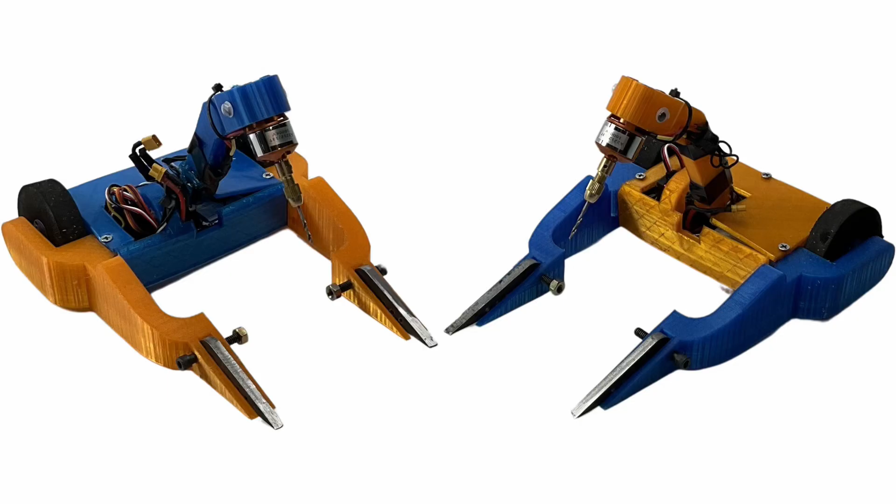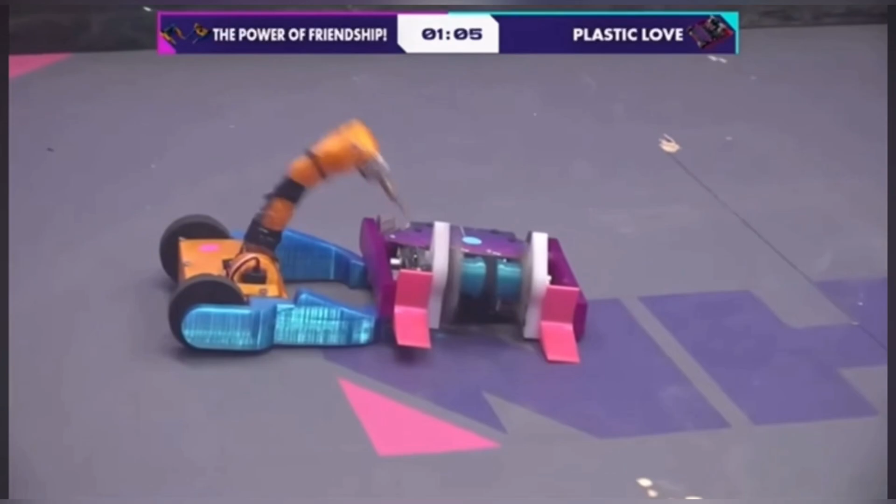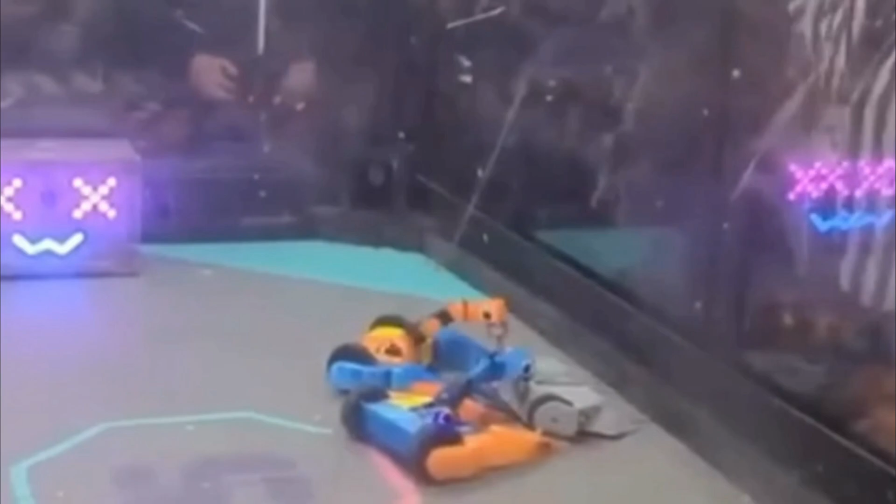I have made a lot of robots over the years, but the Power of Friendship may just be the best bot I've ever built. What started off as just an experiment to see if drills could be effective in modern robot combat quickly spiraled off into something greater. The Power of Friendship absolutely exceeded my expectations at the NHRL January New Bots event and managed to finish in the top 16 at 3-1, making it my most successful performance at an event ever.

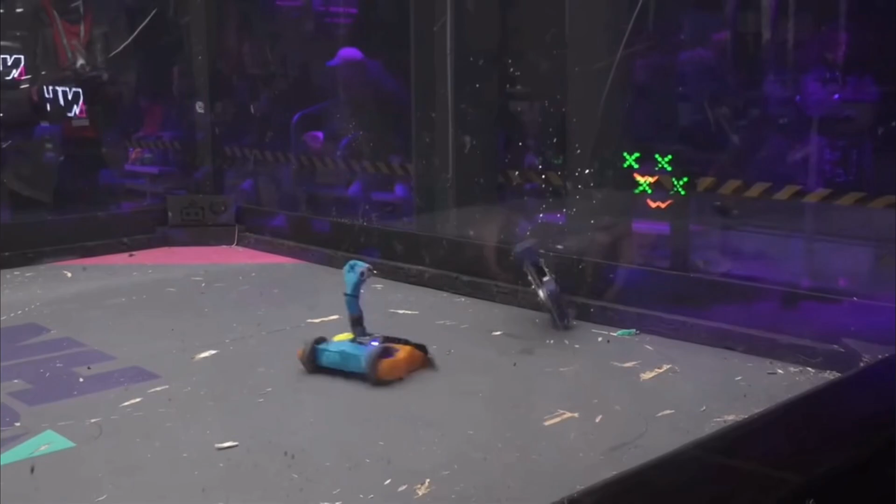Not to mention, the win against Misdirected Aggression is without question the single greatest moment of my entire robot fighting career. Also, the fan response to the Power of Friendship has been just incredible, and so it only makes sense to bring them back better than ever. I actually have a lot planned for the Power of Friendship in the coming months. I have signed them up for the September NHRL event, and hopefully, if they get accepted, they can do just as well, if not better than last time.

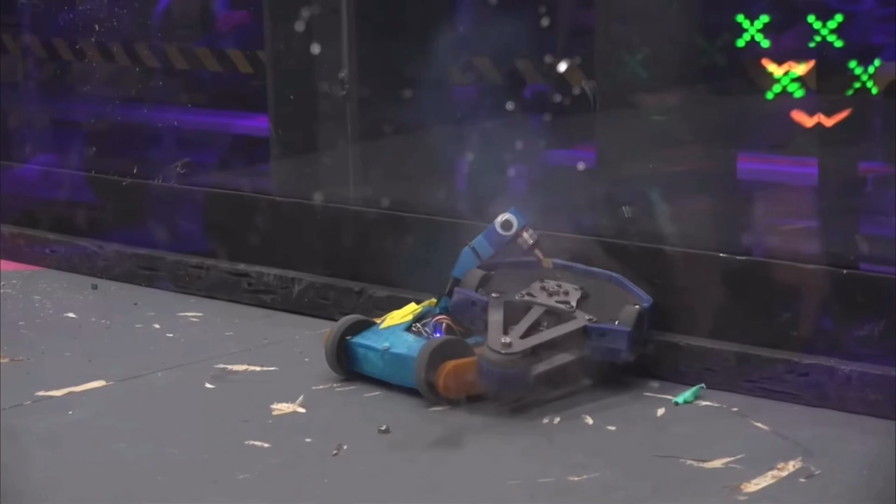The Power of Friendship will also be competing in Mass Destruction on August 24th. However, before all of that, the Power of Friendship will be fighting in T-Town Beatdown on August 3rd, along with some of my other robots. T-Town Beatdown specifically will be a very interesting event for the Power of Friendship to fight at, mostly because of their different rule set to NHRL.

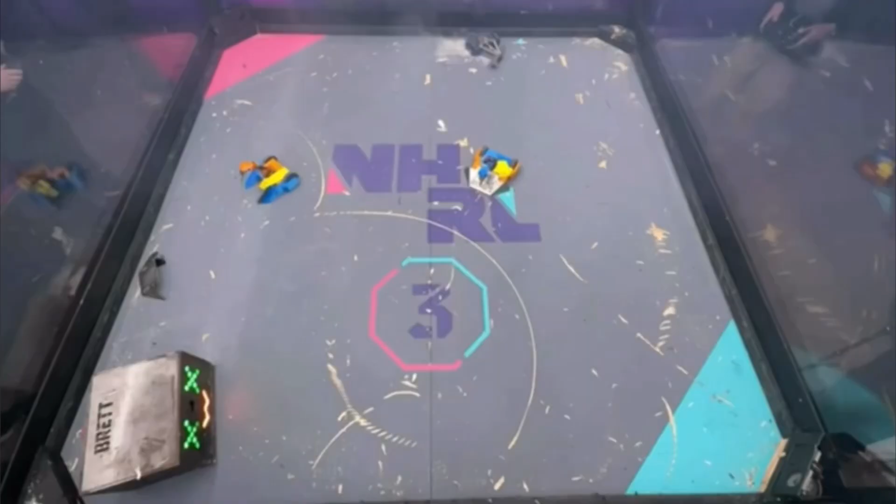At NHRL, Beetleweight multibots get a 1-pound weight bonus, and that's why the Power of Friendship is usually a 4-pound entry that consists of two 2-pound bots. However, T-Town Beatdown does not have weight bonuses for multibots. This means I will only be allowed to fight with one of the Power of Friendship bots at a time. With all that out of the way, let's get into the redesign.

Alright, so here's the CAD for the new Power of Friendship. Real quick, I want to clarify that even though I just said that only one of these bots can fight in T-Town Beatdown at a time, I'm still going to build both of them anyways. And I'm mostly doing that because in robot combat, you really need a lot of spare parts. That's why a lot of people actually bring multiple copies of their robots, because they would want to have enough spare parts to make entire copies of their robots. So at that point, they just bring entire copies anyway.

So similarly, I would want to have enough spare parts to make a second Power of Friendship so I could rebuild everything if I needed to. But at that point, why not just make a second Power of Friendship? So yeah, I'm going to be bringing both bots, but only fighting with one just to make repairs easier, and I can swap between bots whenever I need to.

And also, I don't want them to be lonely. Like, they're siblings, they got to be together. So we're keeping the Power of Friendship together, even if they can't fight in the arena together. So yeah, I'm still going to build both robots.

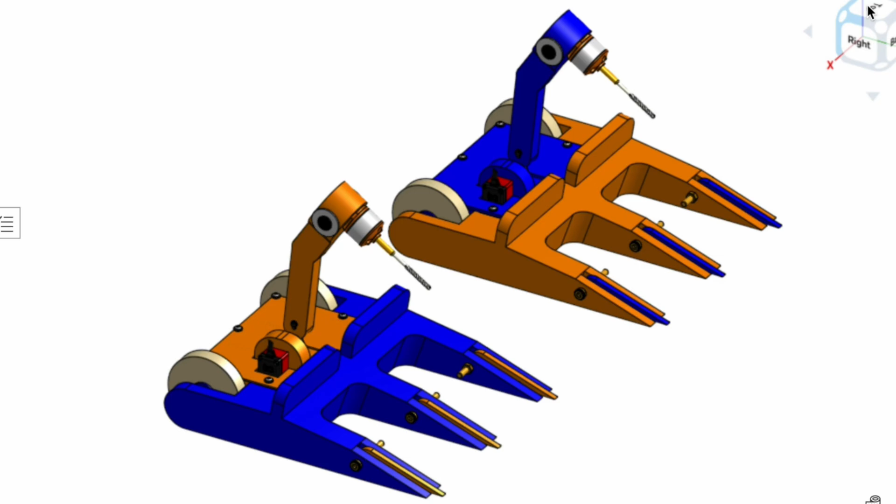Anyways, looking at the CAD, there are a few differences. The Power of Friendship hasn't changed too much. The most obvious difference is the change of the forks. Instead of having 2 forks, I now have 3 forks. And those 3 forks attach to this new fork mount. So it's just one solid piece, as you can see there.

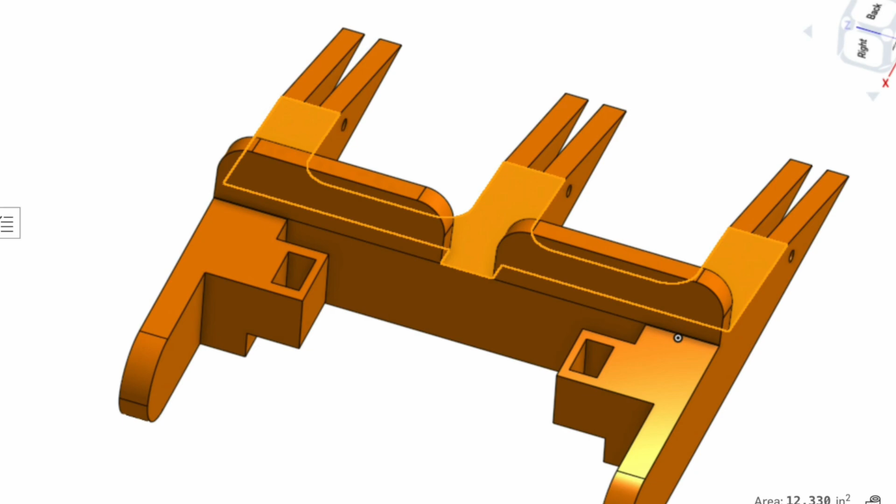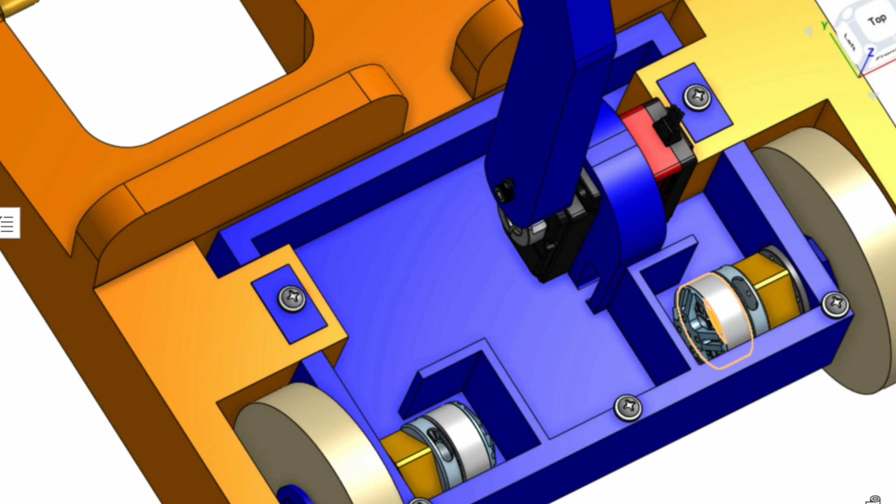So just going to the assembly again, we're just going to look at just one of the Power of Friendship. You see here that it just slots right into the squares for the main body. And talking about the main body, we have the mount where the servo goes into. We have the places where the motors fit in. We actually have these little guards here.

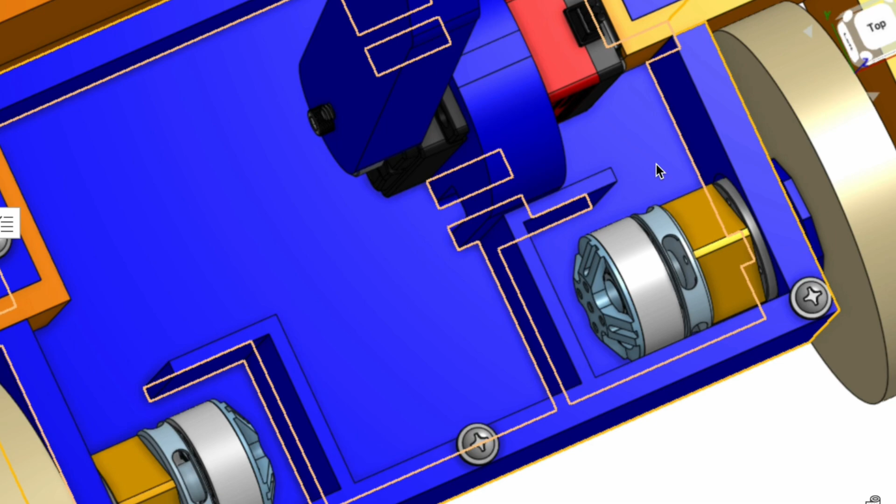That's the thing a lot of robots do. They just make sure that the cans of their brushless motors don't connect with wires, since that can cause problems. So they put something in between there to shield them. So I just have this wall just to make sure that no wires or anything gets in the way of the back of the motors, just to make sure nothing really goes wrong here.

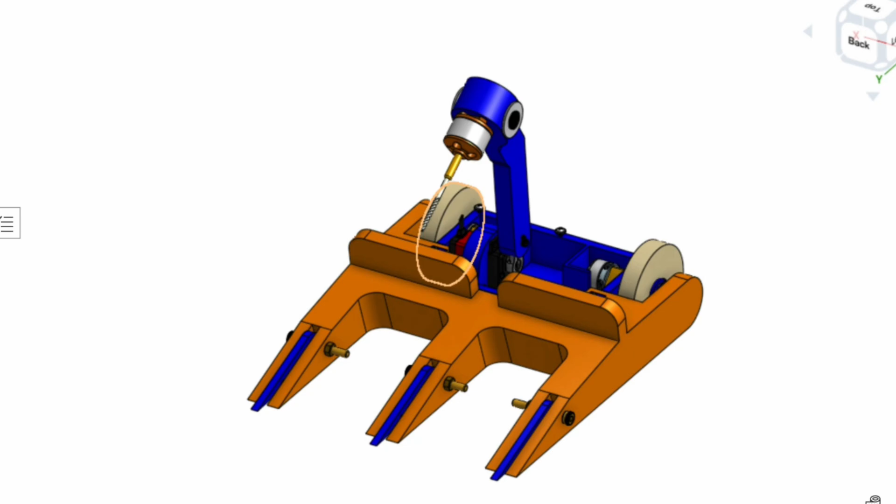So aside from that, the bots are mostly the same. There really isn't a lot of difference. The only changes again are the forks and the drive motors, which I'll talk about more.

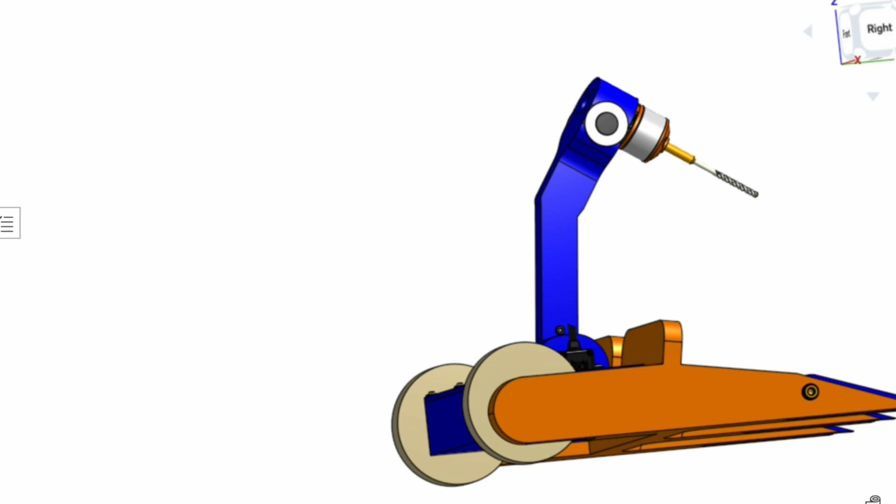I did change the drive motors, which I'll talk about more in a little bit. Oh, another thing I changed, speaking of drive, is that I'm switching from the FingerTech foam wheels to Flex Foam 23 wheels. So that's nice. But yeah, again, the bots are pretty simple.

Not a lot of changes, because, I mean, they did pretty well at the January event. Their only loss was the Catalyst. Painful loss was the Catalyst. But hopefully, with this new fork setup, better drive motors, and all that, that kind of thing doesn't happen again at this next competition. So, yeah, let's get building.

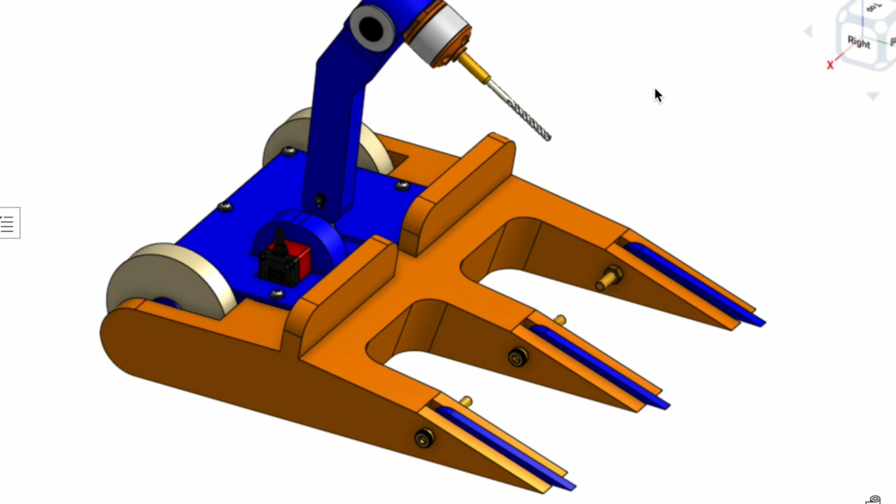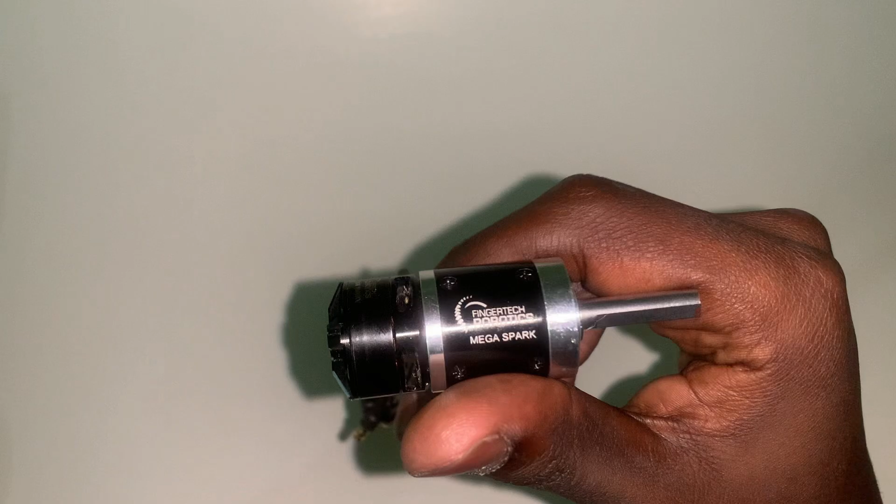All right, let's start talking about the parts and electronics we'll be using. So, the biggest change for the Power Friendship are the drive motors. The Power Friendship used to use these FingerTech Mega Spark brushless drive motors, and they're pretty good. They're the first brushless drive motors I've ever used. I used them in Kill with Fire, Serial Killer, and the Power Friendship, and they were nice.

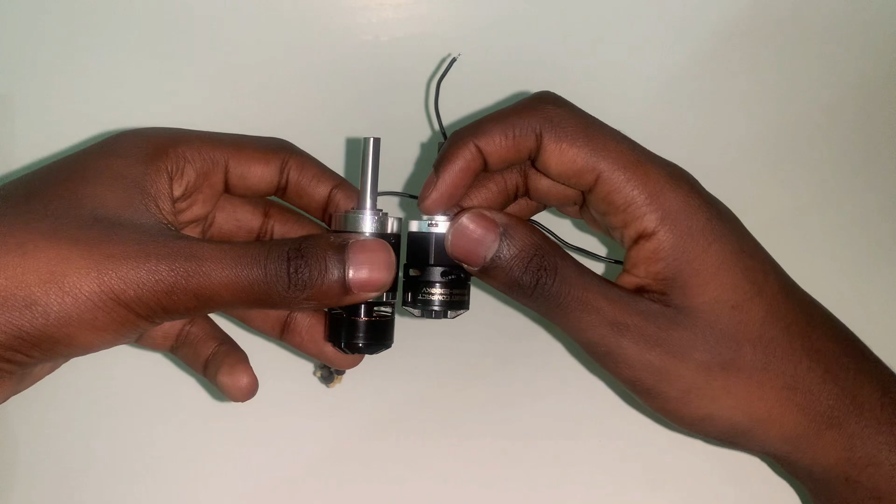However, something smaller and lighter has come along, and those are the Repeat Compacts. As you can see, they're more compact, as the name implies. They're smaller, and I think they're about 30 grams lighter, which is great. When every gram counts, you just got to know what to use. And I've heard good things about these. Some of my friends have used them, and they're pretty great.

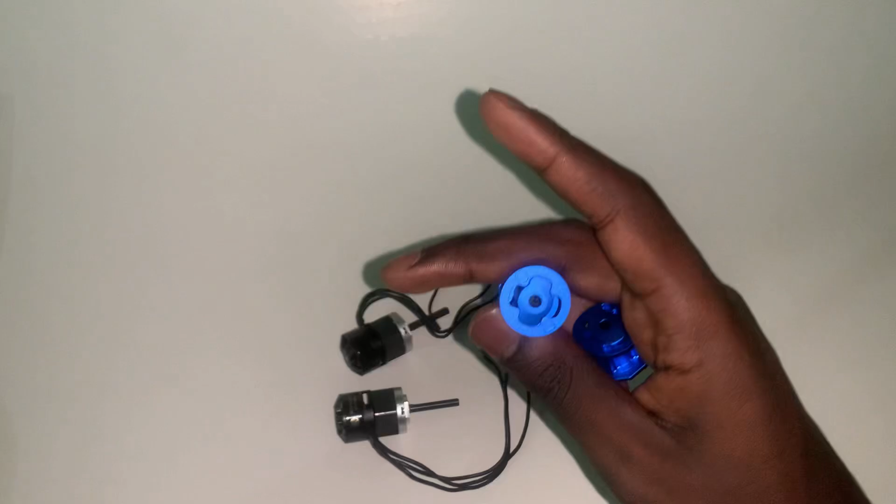So like I said, the biggest thing is that they're smaller and lighter than the previous motors, so there's no real reason not to use them. I'm happy to try these out for the first time. Then we have the FingerTech hubs. This is what we're going to be attaching the wheels to. We'll talk about the wheels later. The FingerTech twist hubs, I've used them a bunch, and I'm pretty happy with them.

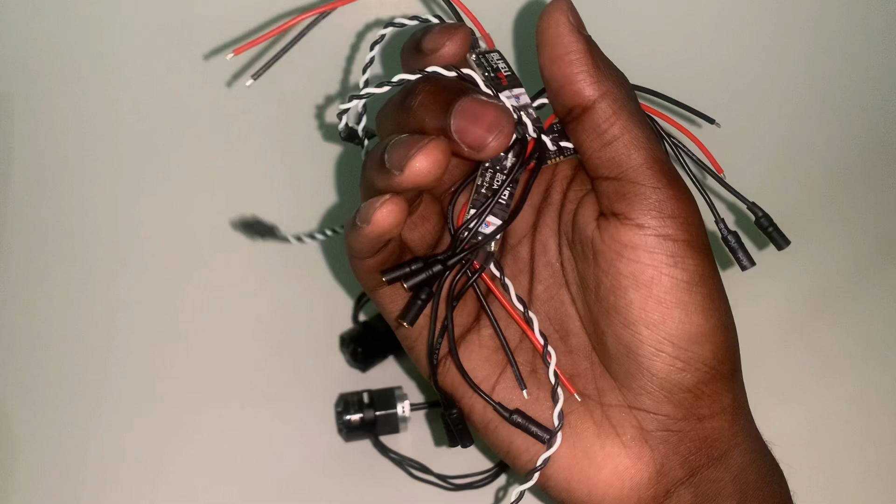Then we have the ESCs. I'm probably gonna switch to different setups for drive motors in the future, but I have a bunch of these ESCs lying around, so I might as well use them, especially since I'm trying to save money, because I've spent a lot on robots recently. So I have 3 of these ESCs. 2 will be for the drive motors, and 1 will be for the weapon motor. This is the exact same setup I used in the last version of Power Friendship, and it worked out fine.

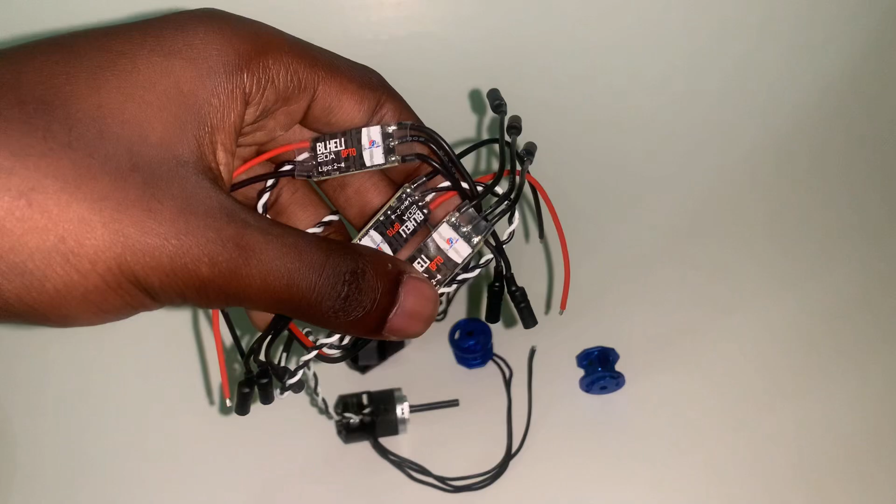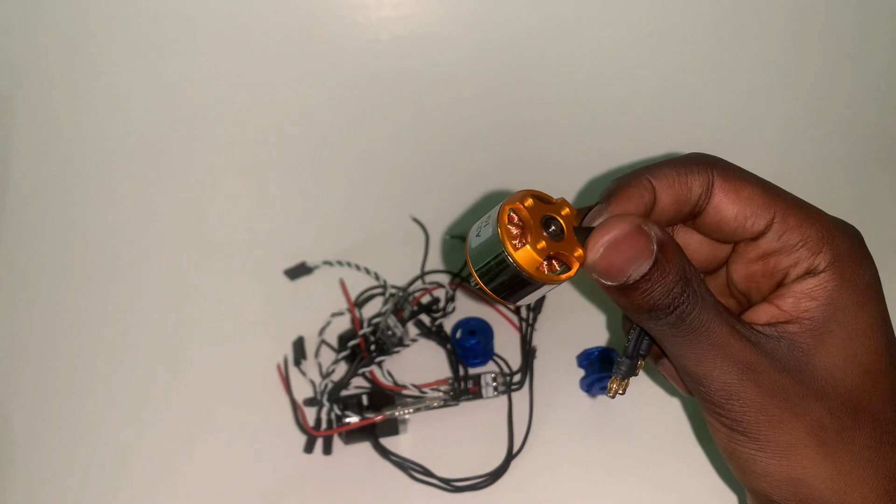Then we have the weapon motor, a very basic brushless motor. Again, I bought a bunch of these in bulk a while ago, so I might as well use them while I have them. Here's the drill chuck with the drill bit that will attach to that motor. We'll talk more about this later too.

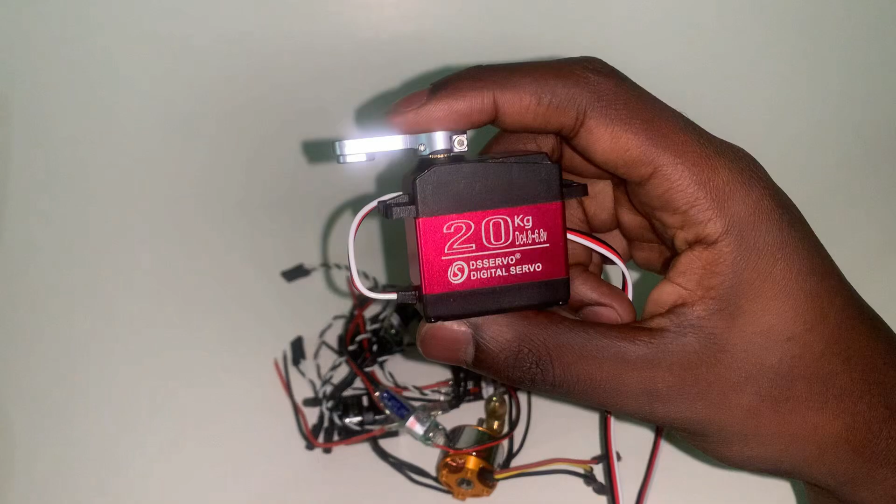We have the BEC, of course. Then we have the servo for the arm. This is a 20 kg servo. I've used these exact servos in almost all of my bots: Power Friendship, Serial Killer, and Kill with Fire. It's a really powerful servo that gets the job done. If it ain't broke, don't fix it, you know? So we're gonna use that again.

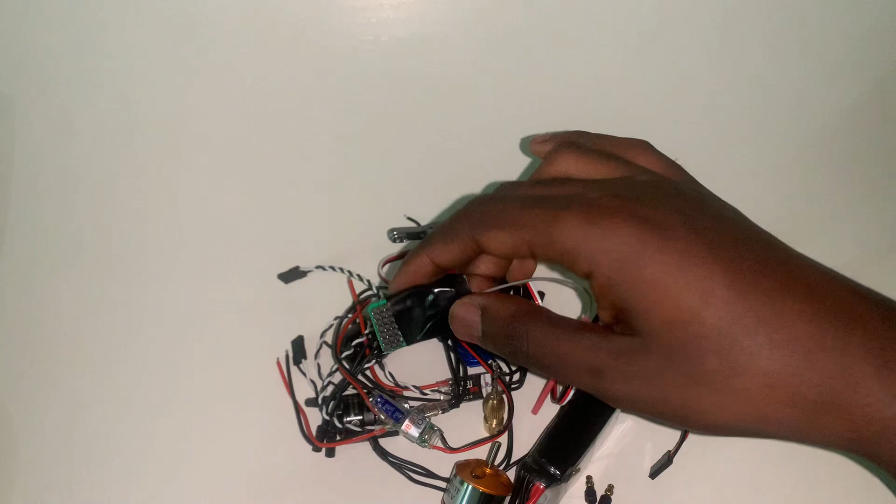We got our 4S battery and our receiver. Obviously, there's some other stuff that's missing, like the TPU stuff, but we'll get into that later. So this is just what we're starting off with.

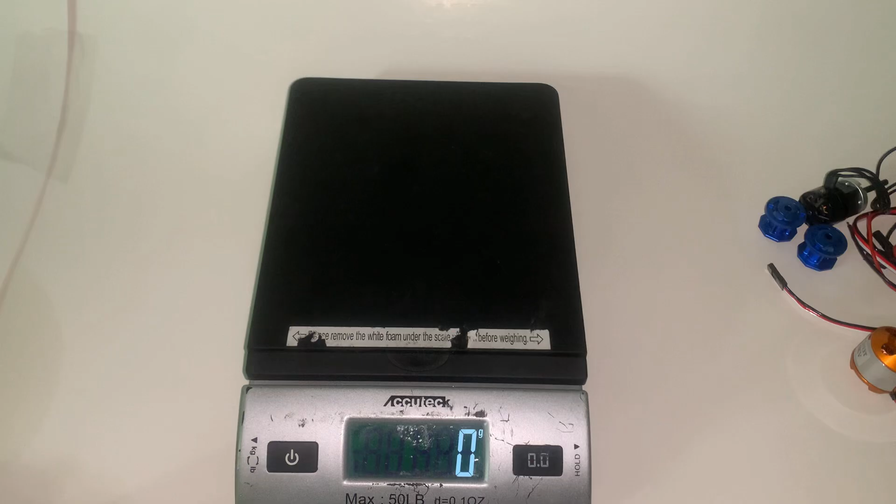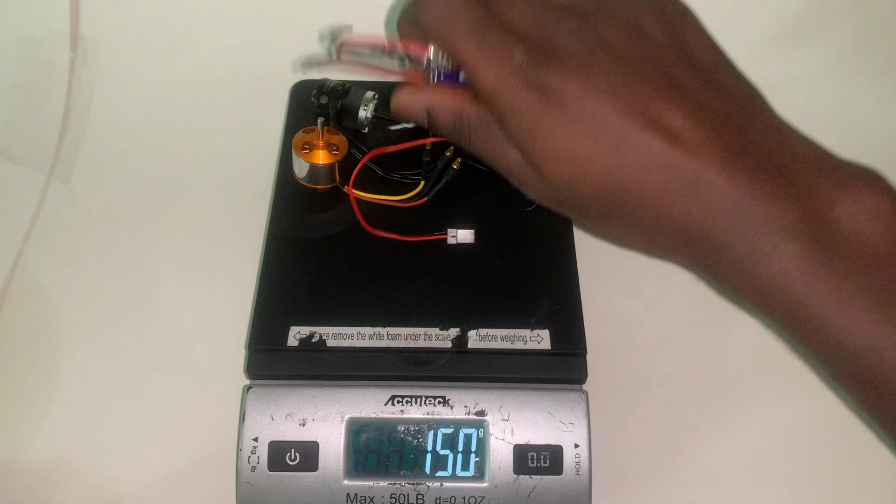Oh, I dropped the drill bit. I dropped it. We're keeping that in though.

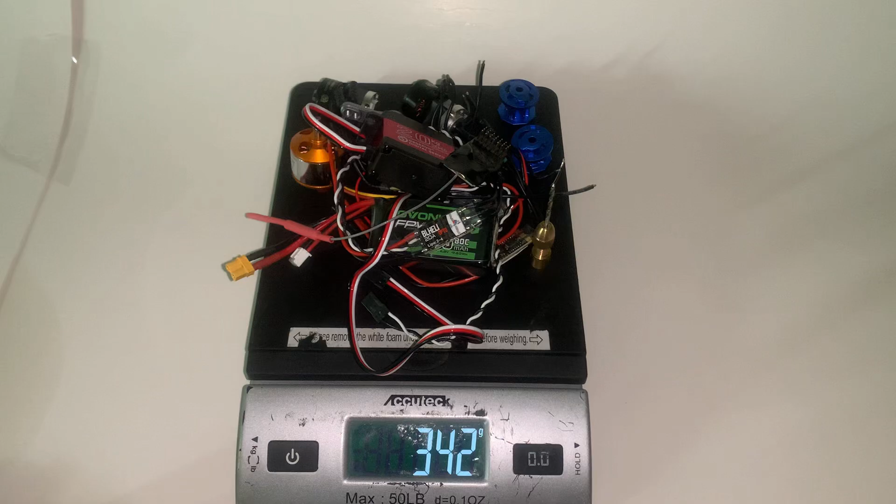Okay, then the servo, the receiver. So the electronics are pretty light, about 342 grams, and that leaves plenty of weight for everything else. The best part is that with the TPU stuff, we can mess around with the infill and wall density. So when we first make the robot about 3 pounds, whenever we want to go back to 2 pounds, I can just adjust the infill and the walls to get it back there, since the electronics aren't really holding us back in terms of weight.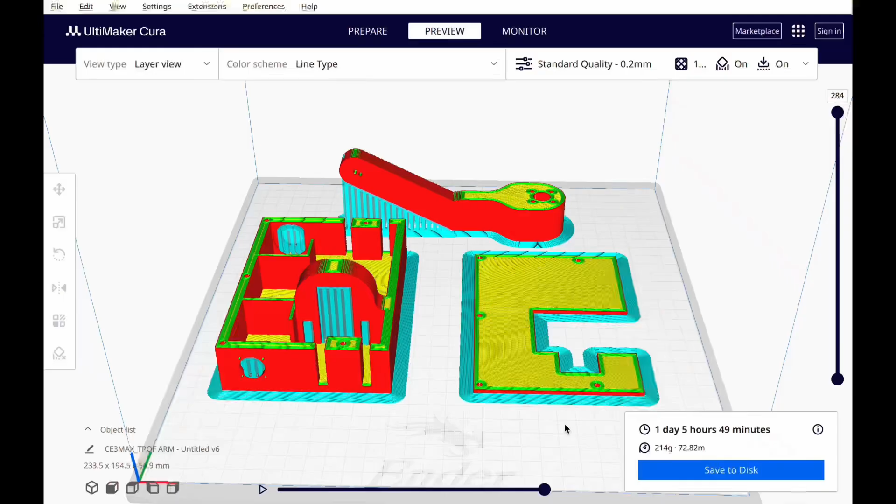So yeah, looking pretty good so far. Let's get into the next step. All right, so here's a look at our first batch of parts we'll be printing. These are the orange parts. We have the main body, the top panel, and the weapon arm. I'm mostly showing this because I just think it's really cool to see the 3D printing process.

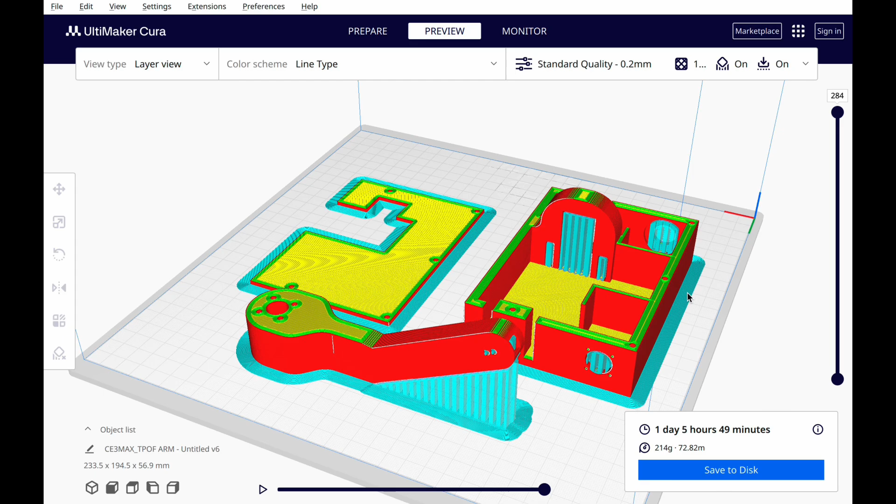So this light blue stuff, those are support structures. Since if you're not 3D printing something completely flat, you need a support structure so that it can print above that. We have the support structures on all the holes and slots and whatever. And yeah, so again, this is going to be 3mm walls, 10% infill. And if we want, we can just change that if we want to add more weight or take away weight and be lighter or whatever.

So yeah, this should take about a day to print. And then after that, we can start on the fork mount, which is going to be in blue. So yeah, we're going to print the orange parts first, test fit everything, make sure we're good, and then continue from there. So yeah, let's get to it.

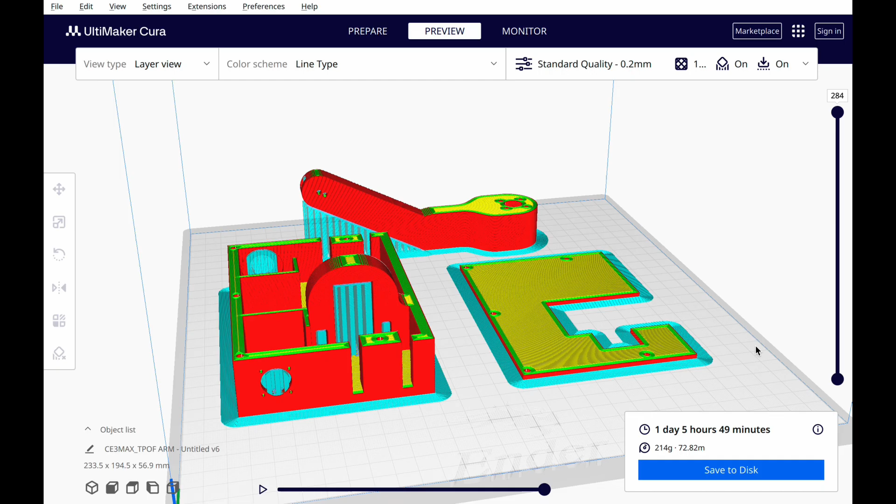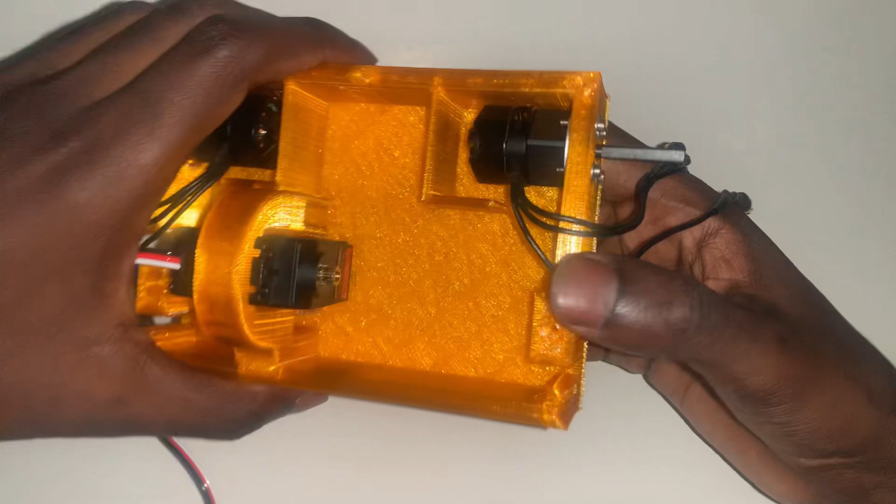Okay, so now that the TPU parts have finished printing, let's take a look at each of the individual parts, just see how everything fits together. So first off, we have the main body. And it came out pretty well. So as you can see, I've already attached the drive motors. They just face mount to the TPU. And yeah, they should be held on pretty well. I've done face mounting for a bunch of my other bots, and I've never had any real problems with that. So might as well keep it here.

The servo just press fits into this opening for it, and it's actually held in pretty snug. And lastly, there's these little gaps there just to help put some of the wiring through. So yeah, overall, I'm pretty happy with this.

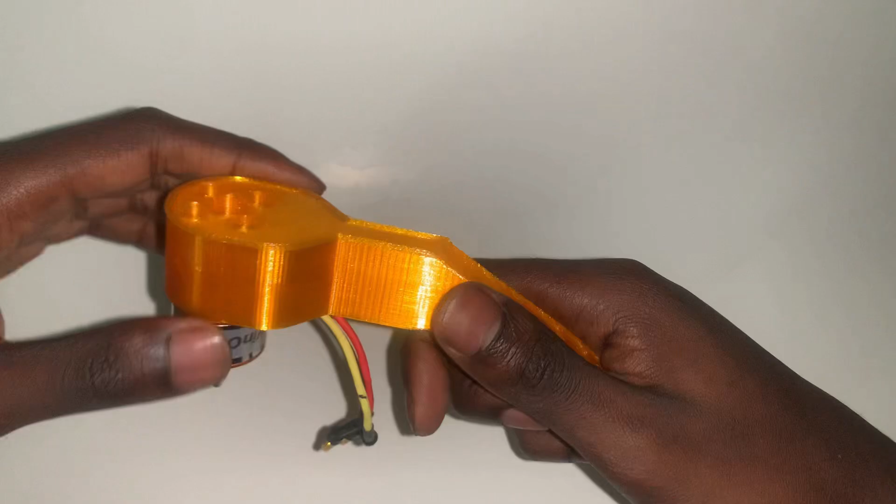All right, now I'm really excited to talk about the weapon arm and how that works. So here it is. As you can see, the TPU arm has finished printing, and it came out pretty good. So I have gotten suggestions to put some kind of carbon fiber side here in order to increase rigidity. And I really want to do that in the future. I just don't think I have the time or money to do that for this specific event. But I'm probably going to do it for like Mass Destruction and NHRL. But for this specific event, I'm just going to have the pure TPU arm.

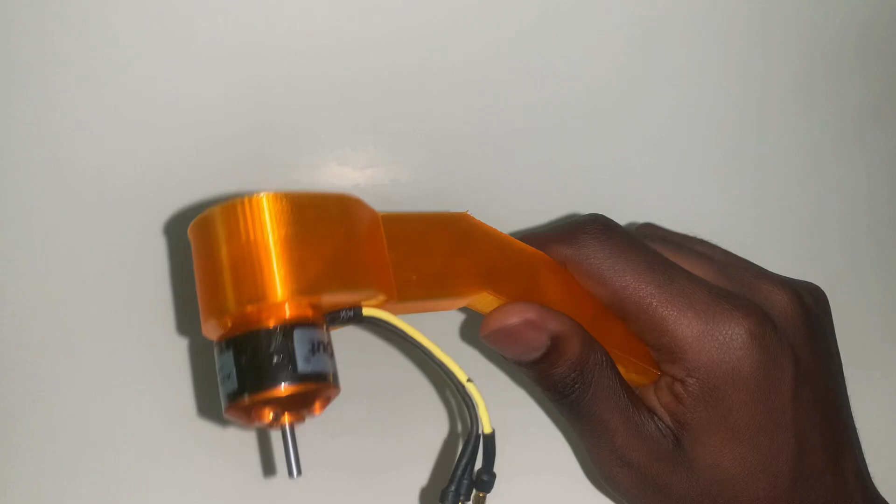However, it's not as bendable as you'd expect. It's 10% infill, 3mm walls. And it is able to press down quite a bit, you know. So I think it should be fine for this event. But again, that's something I really want to change in the future. So next revision, we'll have a carbon fiber side arm. But for now, this is just what we got.

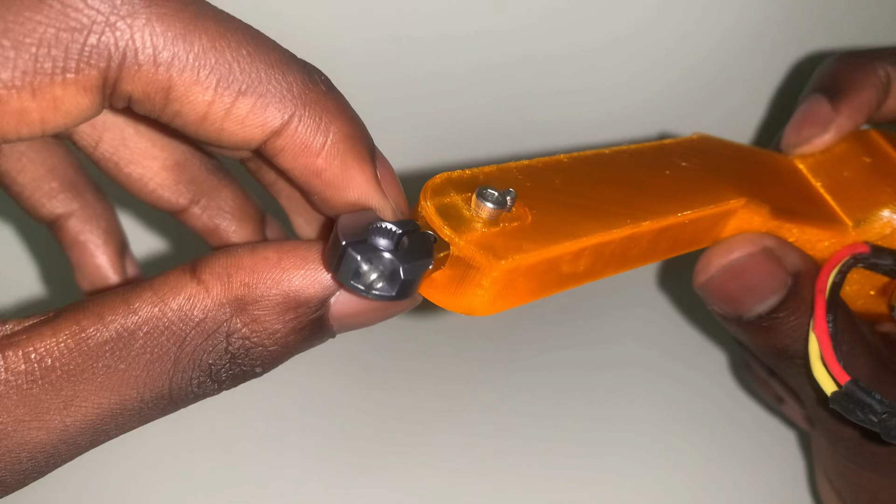Anyways, so the way this connects to the servo is, this servo horn that came with the servo when I bought it, it's literally just put into this opening right here. And then we have the screws that just go through it and the TPU arm. And that's how it's held on pretty firmly. So that's nice. And the same kind of thing applies to the weapon motor. The weapon motor is just directly attached to the TPU arm with these screws that just go in there. And yeah, it's very simple actually, way more simple than you'd think. So yeah, that's how the arm is assembled.

Now, something I'm really excited to show is how I actually put the drill bit on. So I actually got the idea from a random YouTube video. I can't remember the name of it, but some guy did like a life hack to make a very cheap brushless drill. And he got this drill motor and he got a chuck and just put that on there and then put a drill bit on there and it worked. And that's how I got the idea to do a drill at this small scale. So I'm going to show you how I assemble the drill right now.

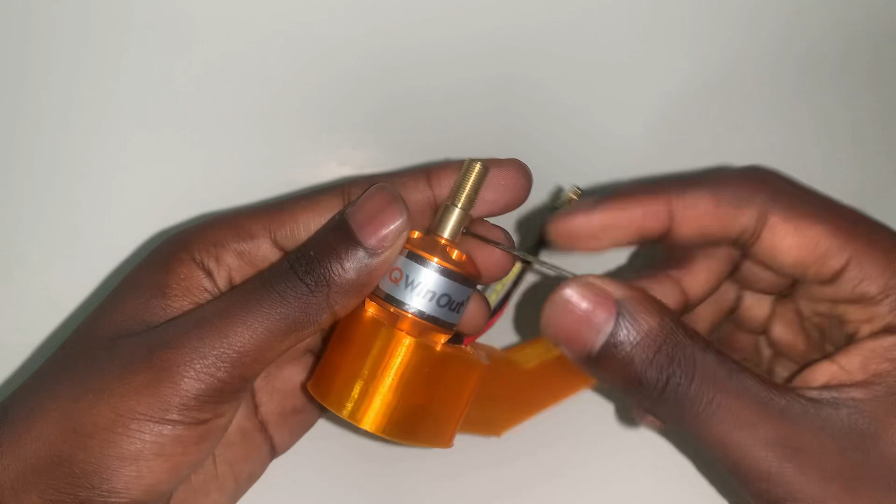So here's the first part of the drill chuck. First, we just put that right onto the shaft. Then we take this Allen key. Okay, hold on. I'm doing this while also looking at the camera. So if I mess up while fiddling around, that's why. But yeah, so we just tighten it around the shaft. Just like that. Come on. Okay. All right. So yeah, there you go. Now the first part is on there.

Now we put on this piece. I have this in different sizes for different size drill bits, but this is what we got first off. You put that right there.

Then we have the drill bit itself. Now this is nothing special. I literally bought a Dremel kit off Amazon for $20 and it just came with a bunch of random drill bits, like in this little case here. And I was like, hey, let's put that on a robot. Let's see how that goes. And this one's just a very basic drill bit.

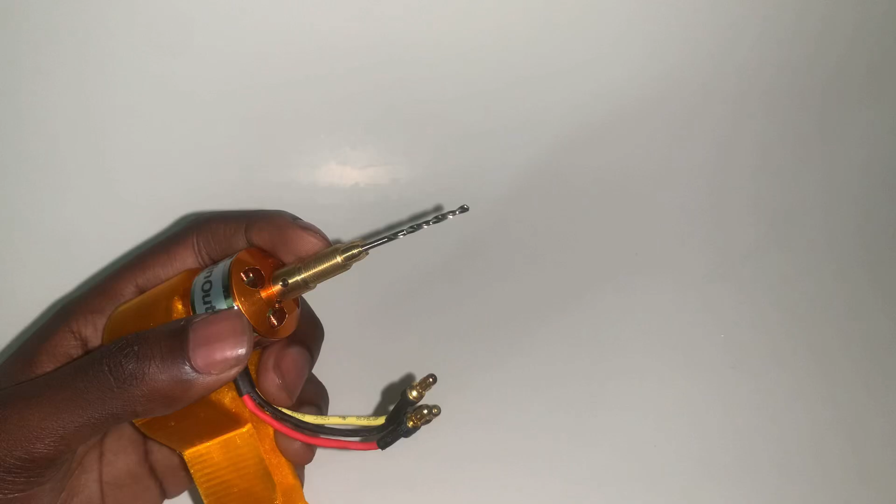Oh, by the way, I've gotten recommendations that I should try other drill bits. Someone recommended that I try a carbide drill burr. And again, that's something that I really want to do, and I'm going to see if I can do it in time for this event. But if I can't do it in time, I'll just save it for another event after that. But for now, we're just going to stick to the classic drill bit for this competition. So yeah, this drill bit just slots right in there.

And then lastly, we have this part. I don't actually know the name of it, but we just turn it around like that, like how you would do for a normal drill. Just twist that. And there, the drill bit is attached. Real quick, I'm going to remember to put Loctite on this to make sure it doesn't loosen during a fight. But aside from that, the drill is attached, and that's pretty much it. It's a very simple drill setup. I don't know if it's the most effective, but that's just how I went about doing it. And yeah, this is the drill arm for the Power of Friendship.

All right, so I've gone ahead and put all the electronics in, everything's soldered together, got everything attached. So yeah, let's do a quick little electronics test. So first we're going to try the drive motors. Okay. Oh, these are nice. I like these. I really like the Repeat Compacts. They're pretty cool. Now the weapon motor. Okay, now we drilling in here. And now the arm. Okay, that's pretty good. So yeah, good test.

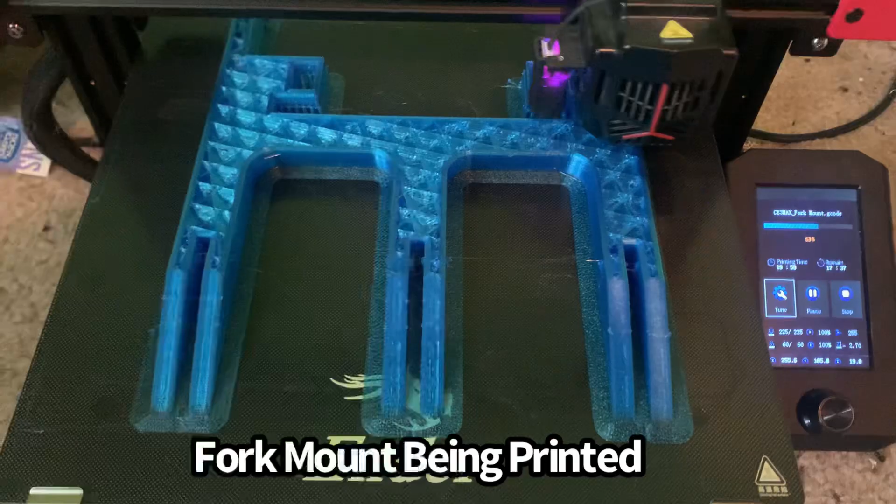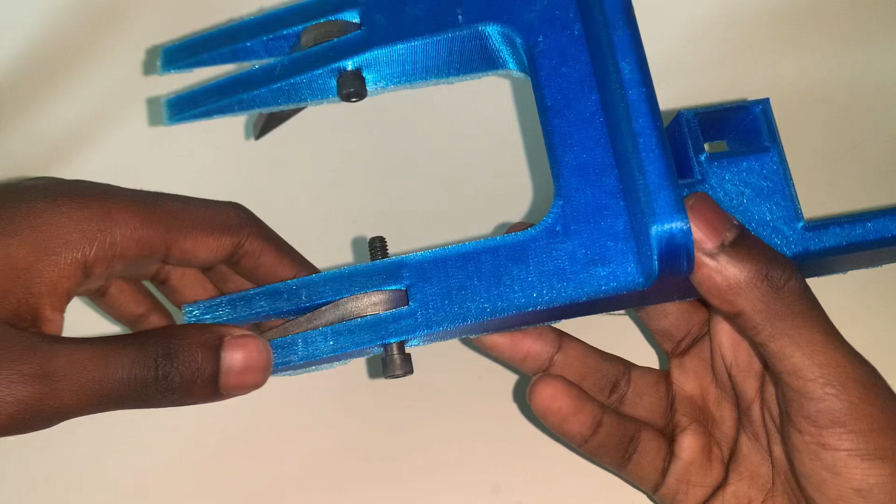All right, now it's time for the next big part of the robot. And when I say big, I do mean big. It's the biggest piece for the robot. It's the giant TPU part that the forks mount onto. And yeah, it took a long time to print. It took like a day and a half, but it was worth it because it came out pretty well in my opinion. So as you can see, the forks are hinged and they attach right to it using these sockets. And yeah, it's pretty good.

Oh, by the way, the forks, I did not make them. They were actually made by Robert Runn from Team Crash Fest. He had a bunch of forks that he just didn't want. And one day he asked me if I wanted them, and I was like, sure. So yeah, he just gave me a bunch of these forks absolutely free. So huge shout out to Robert Runn from Crash Fest. Thanks for the free forks. I really appreciate it. So yeah, that's how they are. Looks pretty good. Pretty happy with it.

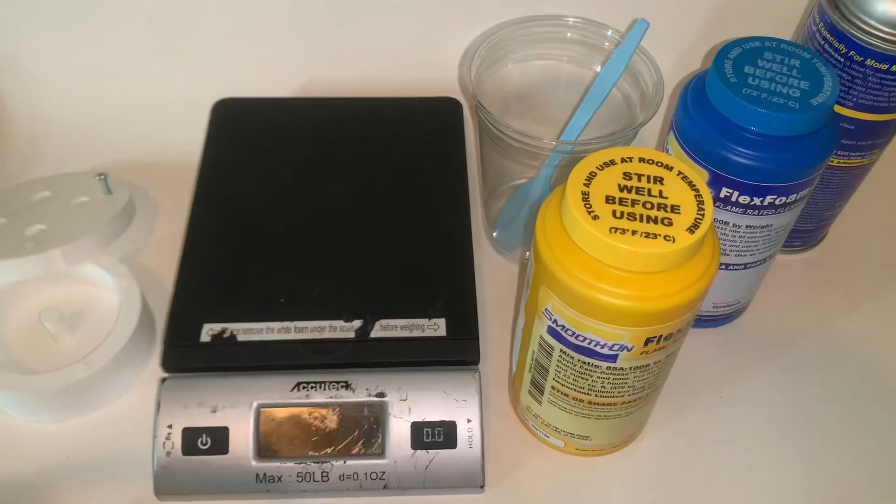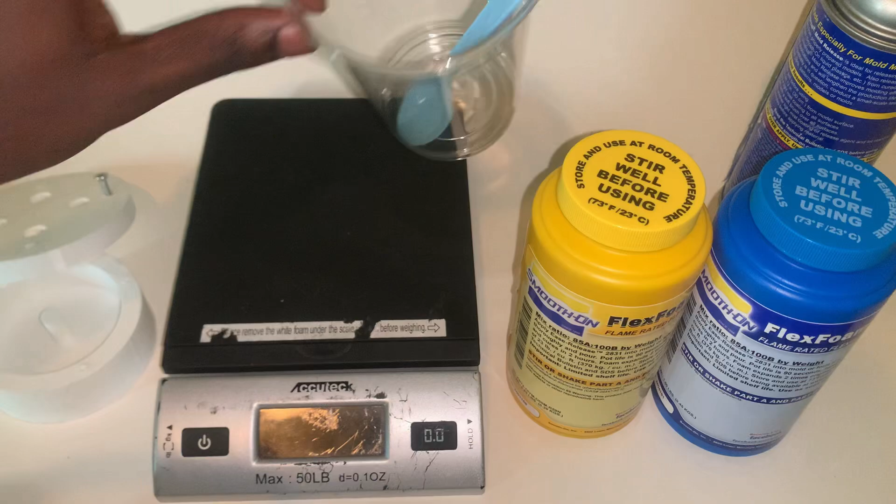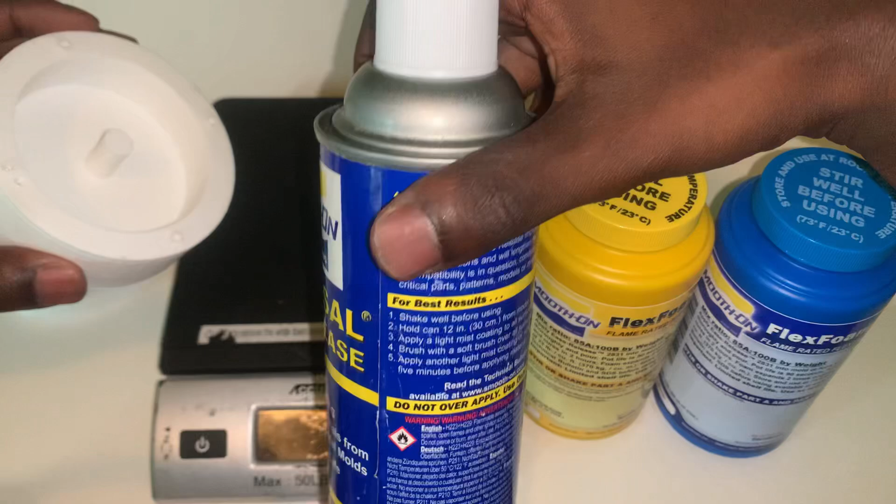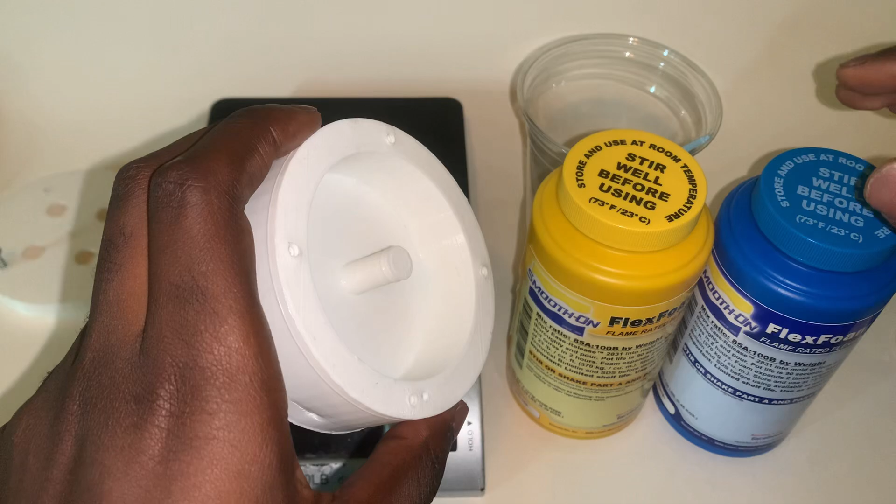But before doing that, we're going to spray it with this mold release. It's basically nonstick spray, but for these kinds of foams. We're going to spray that on here, so that when we pour in the mix, after the foam expands, we can easily take it out. So we're going to mix the right ratio of part A and part B, pour it into this mold after we've put the mold release, screw on the top, and then let it sit and let the foam expand. And after a few hours, our wheel should be done. Now that whole thing is going to take a lot of time, and I really got to pay attention while doing it. So I'm not going to film that. I'm just going to skip right to it being done.

So hopefully that works out. All right. So it's been a few hours and the foam should be finished casting. So real quick, this is actually not my first attempt at this. I actually tried 2 other times before this, but I messed it up both times because my scale wasn't that precise. So I got the weight ratio wrong.

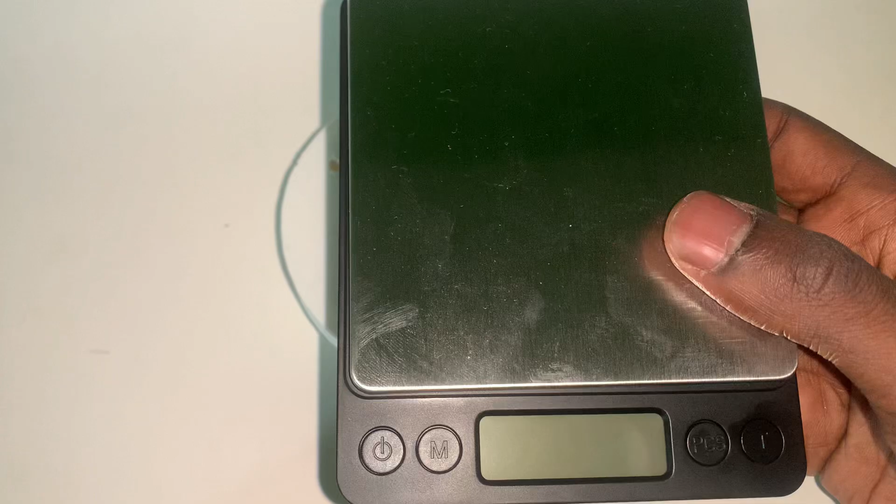So I actually went back and bought a new digital scale, and this one actually counts grams and weight and whatever. It goes to the decimal place, so it's more accurate, it's more precise. And when you're mixing these chemicals, it's really important to be as precise as possible. So yeah, that's what I did this third time around, and it looks a lot more solid. There's some stuff coming out through these holes because there's always going to be a little bit of excess stuff, so I just cut that off.

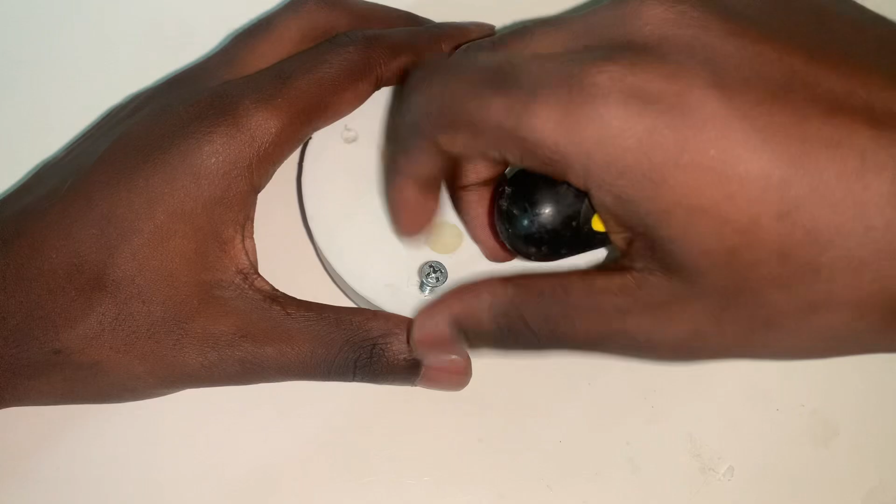But yeah, I think it should be good now. So we're going to go ahead and open it up and see how it goes. So just taking the screwdriver. Again, just wood screws put into the PLA. It's held on pretty well. Okay. And that should be it. And there you go. You can see the wheels. You can see some more of the little circle things that came out top. Again, I could just cut that off to make it smooth.

So now we're just going to try to take it out of here. All right. And there you go. We got a wheel. It's a little bit more bubbly than I would have liked, but it's definitely still usable. I might need to try a few more times. I want it completely solid, but it's very squishy. And yeah, this should be pretty good. Gonna cut this stuff off. But yeah, that's a wheel. It's a little slimy because of the mold release that was still there, but I can just wipe that off. So yeah, overall, pretty good.

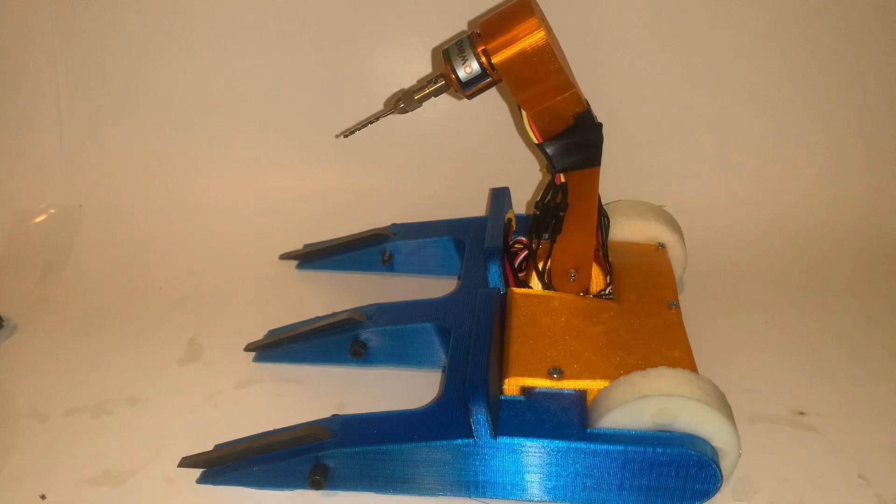Okay, and just like that, we've done everything we needed to get the Power Friendship built, or at least one of them. Now let's take a look. Here it is. The new Power Friendship. And I'm pretty happy with how it came out. This is looking really nice. We got the forks on. We got the wheels on. Everything looks pretty good. So we got one of them done. We got one of them ready to go. Now let's go ahead and weigh it just to see what we got.

Okay, there's my scale. Let's put them on there. Okay, so that's 1,070 grams, which I think converts to slightly over 2 pounds. So yeah, that's pretty good. So whenever we go back to NHRL, we can definitely easily cut down on weight somewhere to get it back to being 2 pounds so we can have both of them fighting together again.

For this specific event, if I have time, maybe I'll reprint some of the parts with higher walls or be thicker or something since I have to wait for it, but it might not even be necessary to do that, but we'll see. Regardless, the point is the bot is looking pretty good. So now let's take it for a drive and let's do some testing.

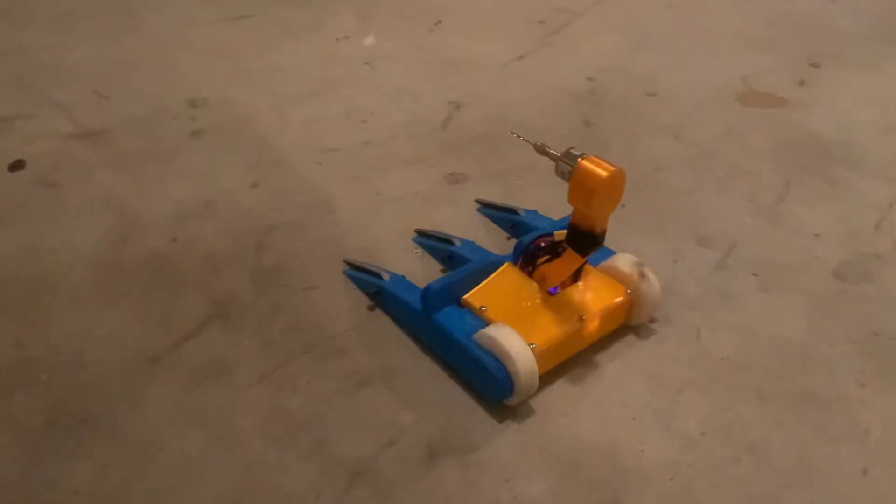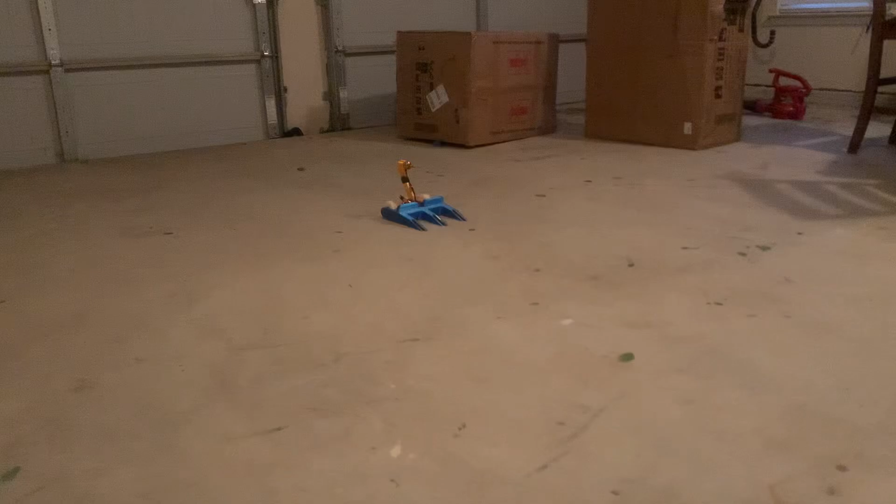All right, now we're gonna do a drive test. We're actually doing this one in my garage since there's more space, and the motors in this robot are actually pretty fast, which you're about to see right now. So let's go. All right, that's looking pretty good. Yeah, the robot drives pretty nice so far. Admittedly, it doesn't turn the best because of the longness of the forks, but aside from that, that's pretty good. Okay, I say that's pretty good.

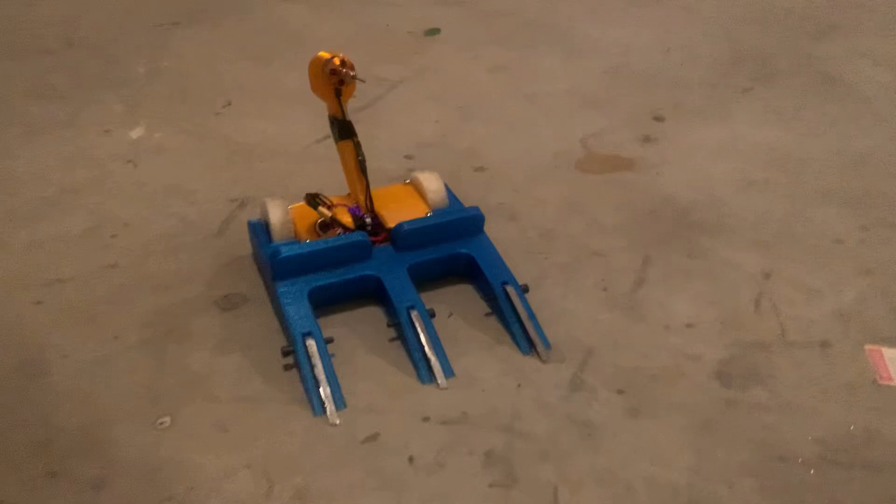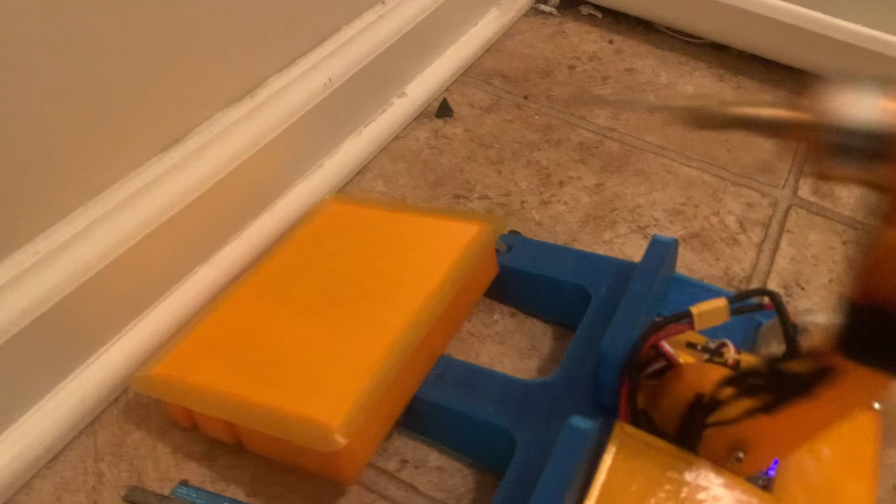All right, now we're gonna do a test with the drill. Here's a TPU chassis that failed printing, so just gonna use that as a test target. So let's just see how the drill does. Let's do this. Okay, that went pretty cleanly through. That's pretty good.

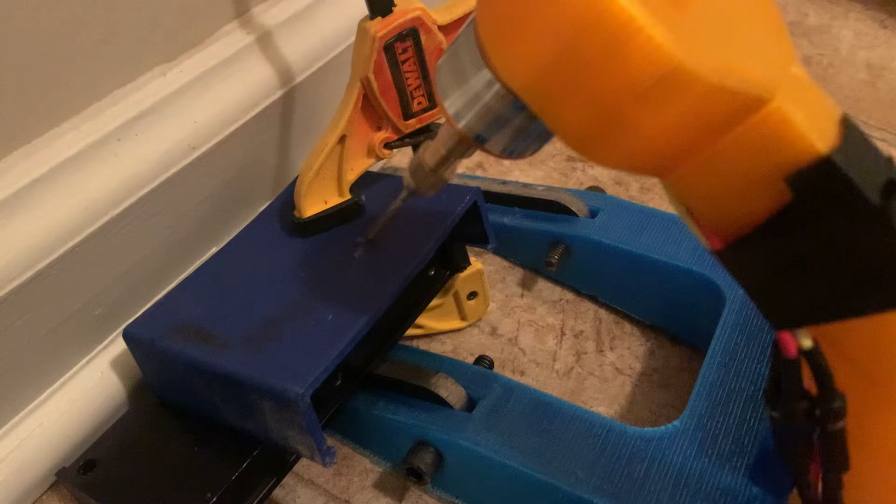All right, we've already done TPU. Now let's see what happens when we drill PLA. Let's do this. Oh no, that went through. That is a hole. Look at that. Pretty happy with that. All right, time for our last test.

This random plastic case I found in my junk drawer. I'm gonna be honest with you guys, unlike the PLA and the TPU, which are actually used in combat robots, this has nothing to do with that at all. I just really want to drill a third thing just for the fun of it. Drilling things is just really, really fun. So here we go, let's do this.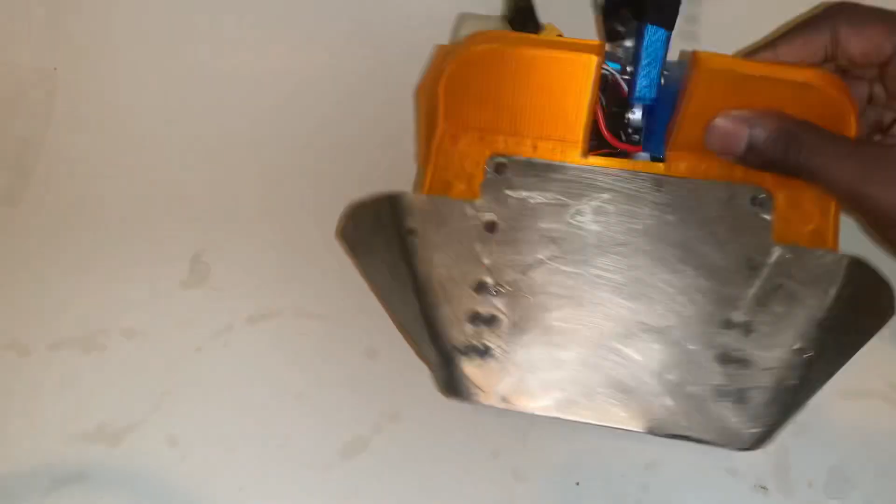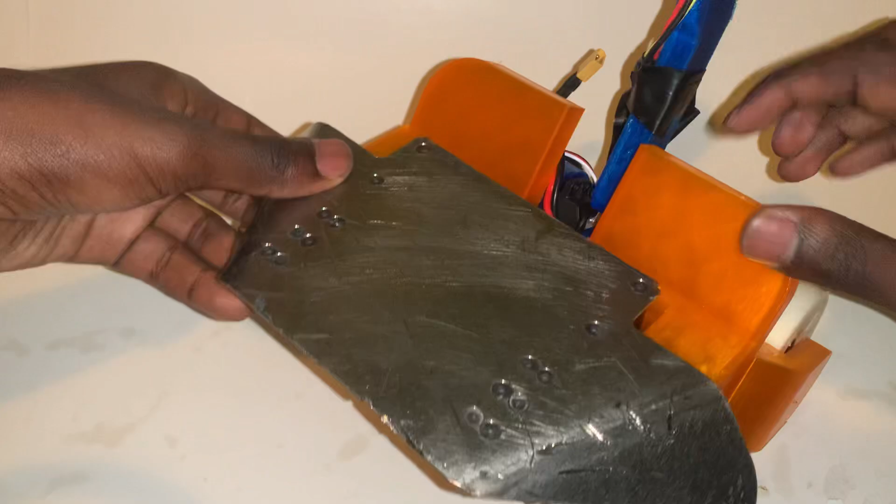So the way the wedge mounts is similar to the way the forks mount on the other one. It's just these sockets that go all the way through the TPU and through the brackets of the wedge. You also notice these higher walls on the TPU part of the wedge. That's just to help protect the neck, to make sure that if a horizontal spinner rides up the wedge, it hits this first and doesn't cut the arm off or anything. But aside from that, the robot's basically the same as the previous one.

So again, this one's for fighting horizontal spinners. The other one's for fighting everything else. And it's just going to be really nice to have two robots, even if they're not fighting at the same time, just so that I can swap out bots and parts whenever I need to. So yeah, second robot is done, and I'm pretty happy with it.

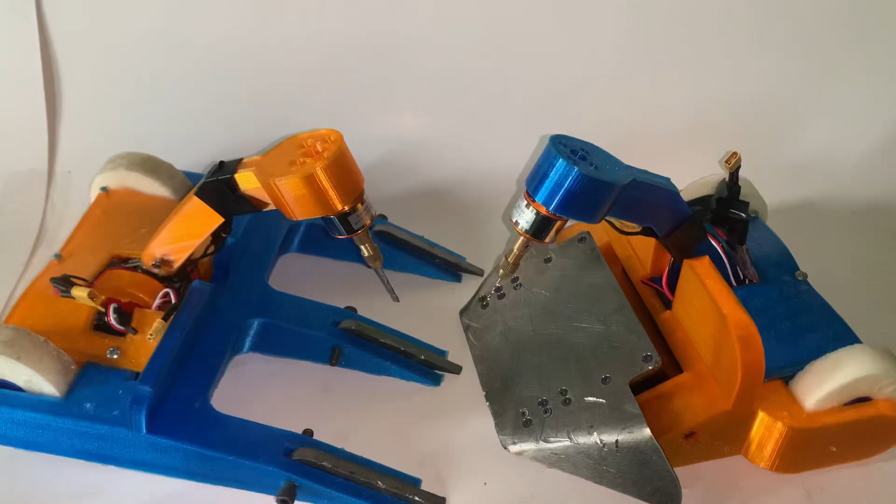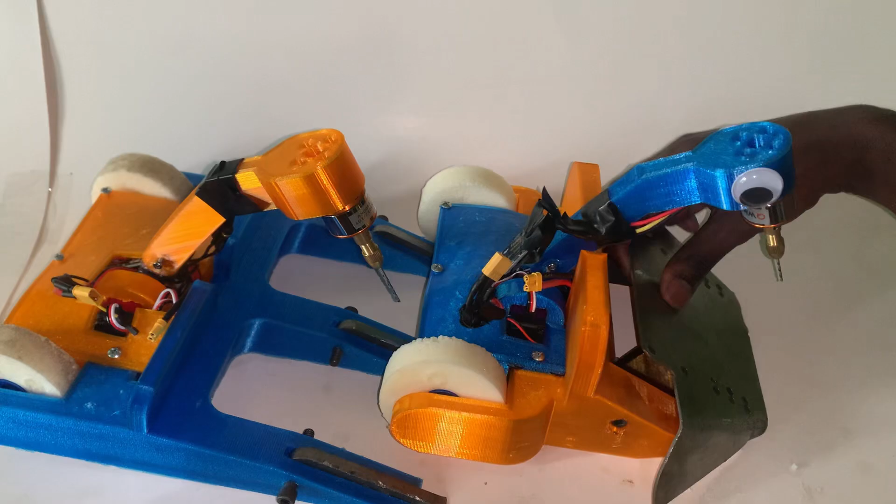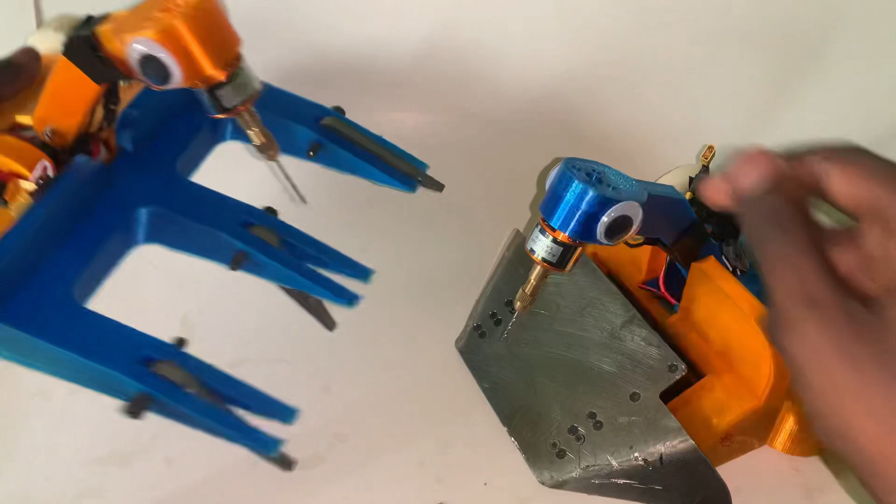All right, both of the bots have been completely built now. We got two bots ready to go. However, there's still one last thing we need to do. It's googly eye time. All right, one right there. Okay. And right there. All right, he's good. And time for his sibling. All right. There we go. Of course, the other side. And there you go. The Power of Friendship is officially back. And with that, we have successfully rebuilt the Power of Friendship.

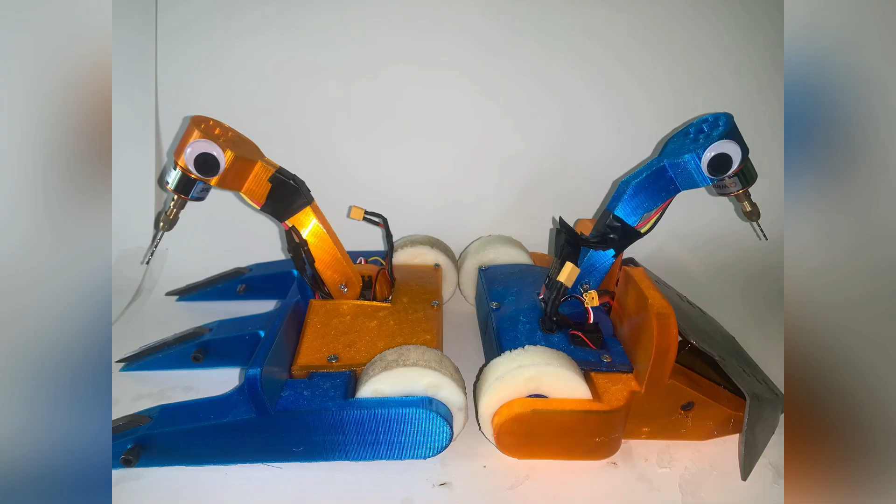It was honestly really fun to put these bots back together, and I can't wait for them to finally get back into the arena. I really feel like I've improved the design, and it's going to be really interesting to see how the bots do. But of course, win or lose, I'm just excited to put on some entertaining fights for the audience. Like I said before, the Power of Friendship has quickly become my most popular robot, and so more than anything, I just want to make the fans happy.

And just like that, this episode of the build process is done. We have officially built every bot we need for T-Town Beatdown. When I initially signed up for the event, I set a challenge for myself to see if I could build a bot for every weight class. It wasn't easy, but I'm very proud that I was able to do just that. At the time of recording, T-Town Beatdown is just a few days away, and you can expect me to make videos showing the fights for all of my bots, so needless to say, I have plenty more robot fighting content coming for you guys.